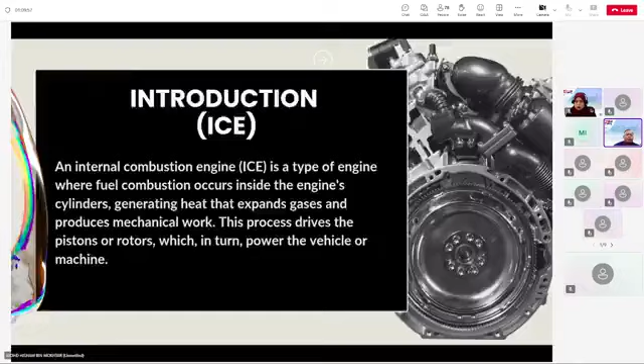What we are looking at today, as content: first, introduction. Second, internal combustion engine. Third, homogeneous charge compression ignition, HCCI. Fourth, reactivity controlled compression ignition, RCCI. Fifth, a new engine, the ammonia engine. Sixth, hydrogen combustion. Seventh, detonation engine.

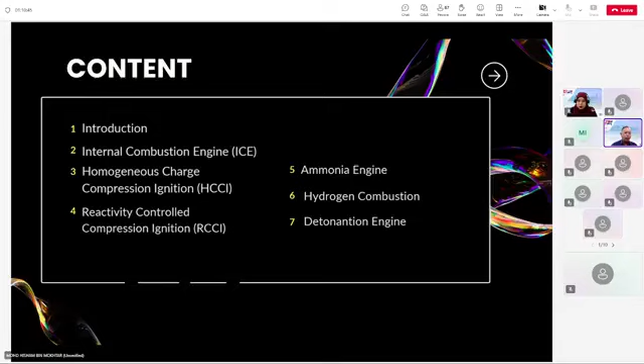I will share some new technology about the internal combustion engine today, so perhaps everyone can understand. Maybe the information is good for your information and knowledge, for all the members of technologists.

Internal combustion engine, ICE. In ICE, fuel is burned inside the engine itself, typically in a chamber called the cylinder. Heat from expanding gases from combustion pushes the piston, which drives a crankshaft to produce mechanical power. ICE are commonly found in cars, motorcycles, and aircraft.

External combustion engine - today we are not talking about the external combustion engine. Fuel is burned outside the engine and the generated heat is transferred to a working fluid, such as water, which powers the engine. As an example, the steam engine, where coal is burned to heat water to produce steam, which then drives the piston or turbine.

So, main engine types: gasoline engine uses a spark to ignite a mixture of fuel and air. Diesel engine relies on high compression to ignite the fuel without a spark. Later, I will explain about the main engine types using gasoline engine and diesel engine.

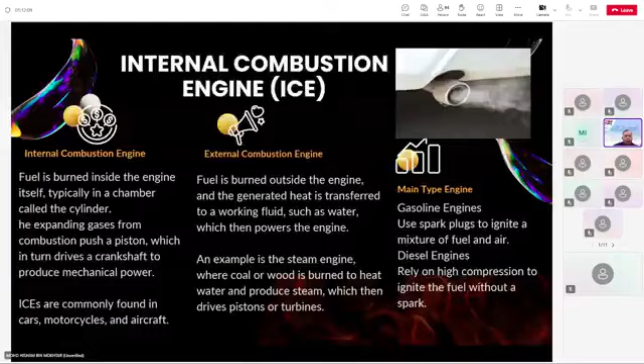Okay, first we are talking about the diesel engine. A diesel engine is a type of internal combustion engine that operates using the heat of compression to ignite the fuel, rather than using a spark plug like a gasoline engine. In the diesel engine, air is compressed to a much higher degree, raising the temperature inside the cylinder. When the diesel fuel is injected into the compressed air, it ignites spontaneously, causing a controlled explosion that pushes the piston and generates power.

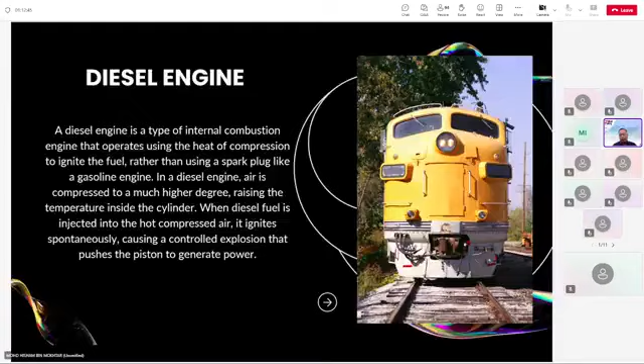Okay, maybe somebody knows, maybe somebody doesn't know about why there's no spark plug. Compression ignition - diesel engines were not using spark plugs. Compression engine is a type that uses compression. In the diesel engine, the fuel is ignited by the heat generated from compressing air, not by a spark plug. Higher compression ratios - diesel engines operate at higher compression ratios, around 14:1 to 25:1, compared to gasoline engines, leading to high temperature and pressures.

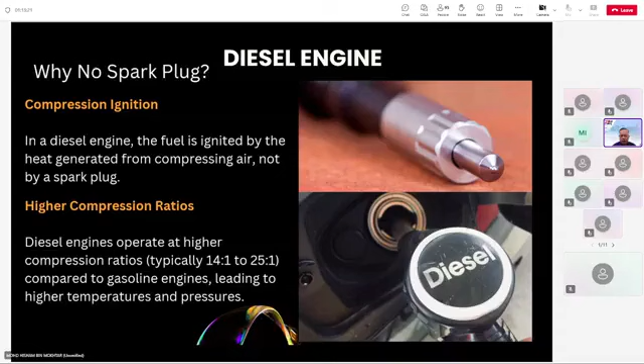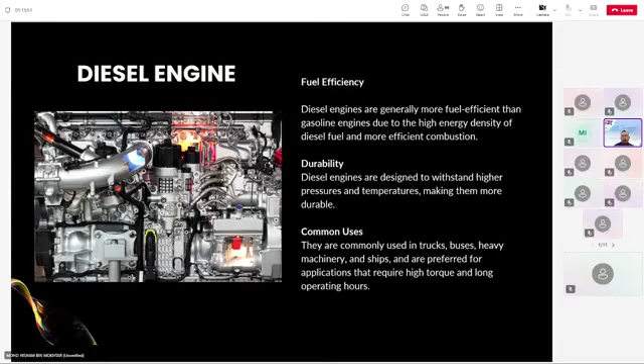Diesel engine fuel efficiency - diesel engines are generally more fuel efficient than gasoline engines due to the high energy density of diesel fuel and more efficient combustion. Durability - diesel engines are designed to withstand high pressure and temperature, making them more durable. Common use - they are commonly used in trucks, buses, heavy machinery, ships, and preferred for applications that require high torque and long operating hours.

A diesel engine relies on compression rather than a spark plug. The key difference between diesel and gasoline engines is how the air-fuel mixture ignites. In a diesel engine, air is compressed to much higher pressure than in a gasoline engine, which raises its temperature. When the diesel is injected into this hot compressed air, it ignites without the need for a spark plug. These are internal combustion engines used for motorcycles, aircraft, ships, and generators due to their efficiency and versatility. However, they emit greenhouse gases contributing to environmental concerns, leading to a growing focus on electric and hybrid technologies.

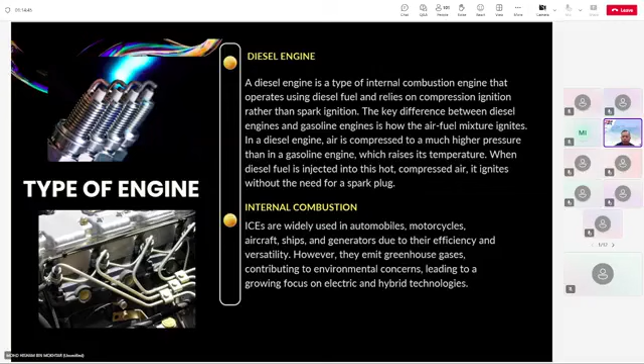Now we're looking at diesel operation. Diesel combustion is known for its high thermal efficiency and torque output, which makes diesel engines ideal for heavy-duty applications like trucks and industrial machinery. However, the process can produce more nitrogen oxide and particulate matter compared to gasoline engines, requiring additional emission control technologies.

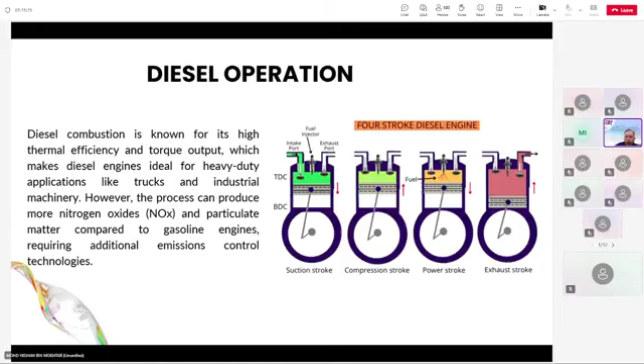This is the process. First, the process is suction - the inlet valve will be open, exhaust valve closed, then air is sucked into the cylinder. Number two, compression - intake valve is closed, exhaust valve is also closed. Air is compressed in the combustion chamber, diesel is injected. During this there is high temperature and also high compression while the diesel is injected.

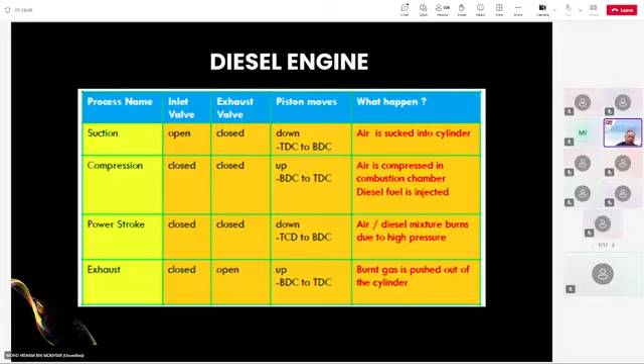Power stroke - intake valve is closed, piston moves, exhaust valve is closed, air-diesel mixture burns due to high pressure. Exhaust - intake valve is closed, exhaust valve is open, burnt gas is pushed out of the cylinder. This is the normal sequence for diesel and gasoline engines.

How about we look at the four-stroke engine operation? Four-stroke is the normal engine we use every day. Intake stroke - the piston moves down, drawing in the air-fuel mixture through the open intake valve. Compression stroke - the piston moves up, compressing the air-fuel mixture to increase its energy potential. Power stroke - the spark plug ignites the compressed mixture, causing an explosion that pushes the piston down and generates power. Exhaust stroke - the piston moves down, then moves up again, expelling burnt gases through the open exhaust valve. This is the normal sequence.

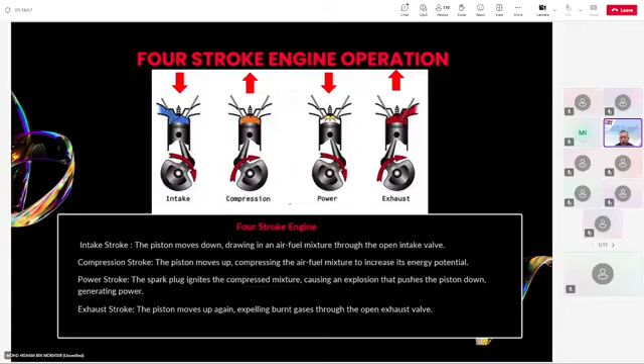How about the two-stroke engine? Two-stroke engine - high power output per displacement, simpler design, better for higher RPMs. Commonly used in small applications like motorcycles, lawn mowers, and chainsaws.

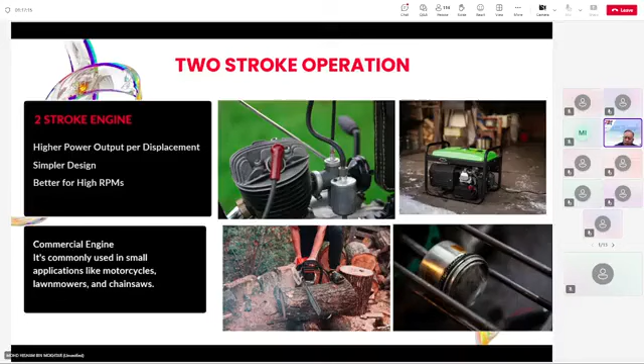For your information, in a two-stroke engine, the intake, compression, combustion, and exhaust processes occur in two movements of the piston. That means compression and power stroke combine into one downstroke process. Then exhaust and intake combine into one upstroke process. The two-stroke engine is known for being simpler, lighter, more compact, but is less fuel efficient and produces more emissions compared to the four-stroke engine.

So as we all know, this two-stroke is a small engine, used in applications like motorcycles, lawn mowers, and chainsaws.

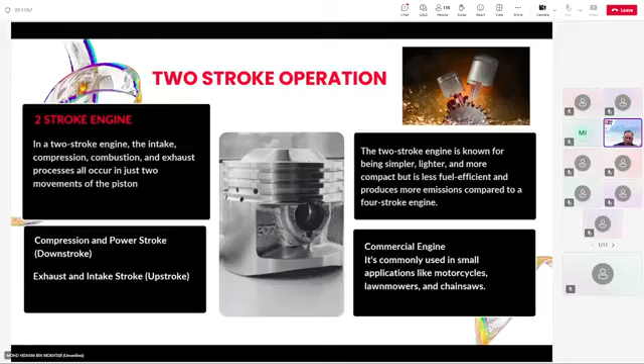Now we start on the potential of ICE. The potential of ICE is the new technology called homogeneous charge compression ignition, HCCI - an advanced type of internal combustion engine that combines elements of both spark ignition used in gasoline engines and compression ignition used in diesel engines. HCCI engines achieve combustion by compressing a homogeneous air-fuel mixture to the point where it spontaneously ignites due to high pressure and temperature, eliminating the need for a spark plug and precise direct fuel injection timing for ignition.

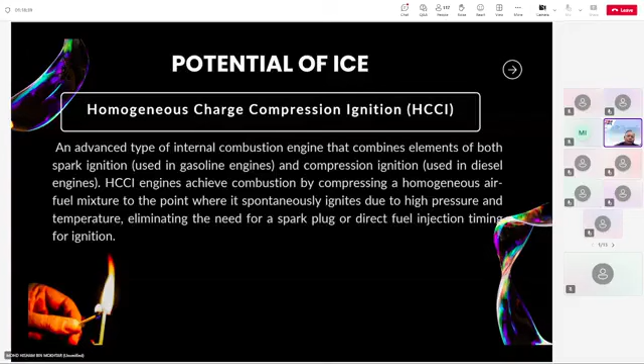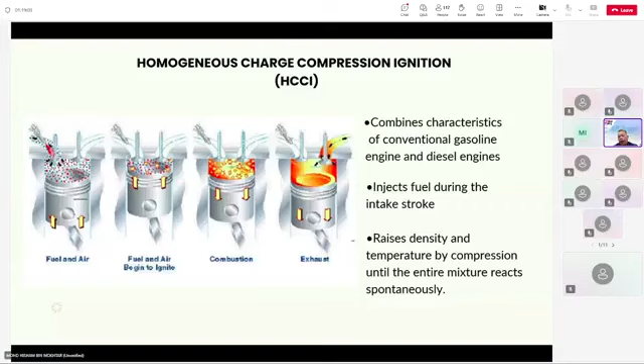This is HCCI. HCCI means homogeneous charge compression ignition. It combines characteristics of the conventional gasoline engine and the diesel engine - fuel is injected during the intake stroke, raising density and temperature by compression until the entire mixture reacts spontaneously.

For your information, HCCI has gasoline engine-like emissions with diesel engine-like efficiency of 50 to 60% combustion efficiency, raising density and temperature by compression until the entire mixture reacts spontaneously.

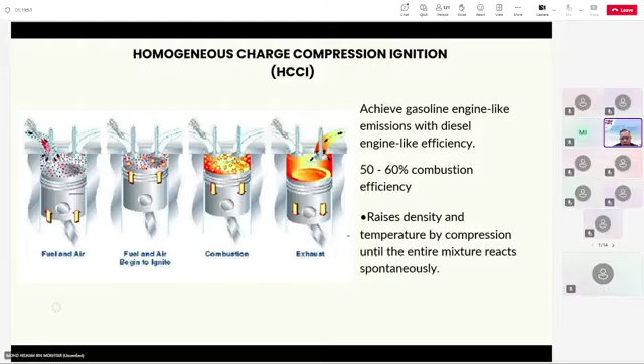For your information, the fuel and air were mixed before entering the combustion chamber. The fuel and air begin to ignite as the mixture is compressed. Then combustion happens at the combustion stroke, followed by the exhaust stroke. After that, the exhaust valve opens to let the scavengers out.

Homogeneous charge compression ignition, HCCI, has some weaknesses. Auto ignition is difficult to control, it has a small torque range, and is constrained at low load due to lean flammability limits, and high loads are restricted by in-cylinder pressure, with only a small range of stable combustion. Because HCCI is still under development, these weaknesses need to be overcome to get better results for this engine.

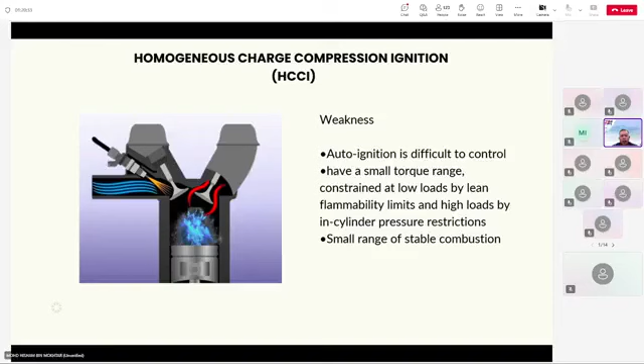Several countries and leading automotive companies are actively researching and developing HCCI engines to improve efficiency and reduce emissions, such as USA, Japan, Sweden, South Korea, and China.

Now we are changing to RCCI, Reactivity Controlled Compression Ignition. It is an advanced combustion technology that aims to combine the benefits of traditional diesel engine efficiency and gasoline engine low emissions. RCCI is a dual fuel combustion concept that strategically controls the reactivity of different fuels to achieve superior performance and cleaner combustion. This is quite special.

In RCCI there are two types of nozzles or injectors, PFI and DI. PFI means low reactivity fuel, DI means high reactivity fuel. It requires two different fuels - you must remember the cylinder requires two different fuels. Low reactivity fuel gets injected into the intake port at low pressure during the intake stroke. High reactivity fuel is injected into the cylinder at high pressure near the end of the compression stroke. The whole fuel charge is ignited near top dead center of the piston by injecting the high reactivity fuel.

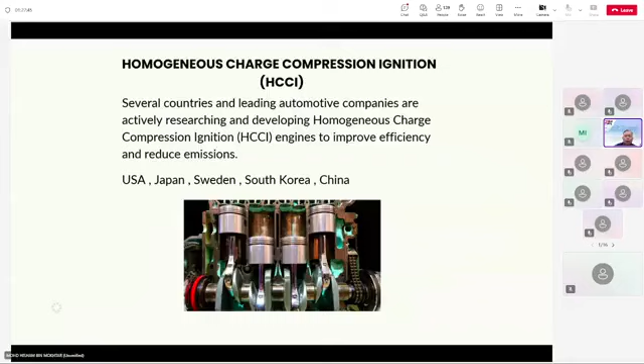Before we go to the RDE, let's go back to RCCI first. I come back to RCCI because there is some process that I can explain. It's an advanced combustion technology aimed to combine the benefits of traditional diesel: efficiency and low emission.

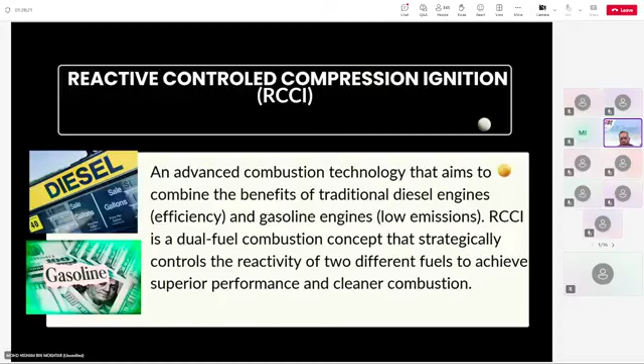RCCI is a dual fuel combustion concept that strategically controls the reactivity of two different fuels to achieve superior performance and clean combustion. This combustion process needs two types of fuel. First, PFI, a low fuel reactivity fuel, requires two different fuels.

During the combustion engine, the PFI will be injected through the intake port. Then the high reactivity fuel is on standby to ignite, to be sprayed during the high compression.

Low reactivity fuel gets injected into the intake port with low pressure during the intake stroke. High reactivity fuel gets injected into the cylinder with high pressure at the end of the compression stroke.

That means both different fuels are used to get the explosion and the combustion. The whole fuel charge ignites near top dead center of the piston by injecting the high reactivity fuel.

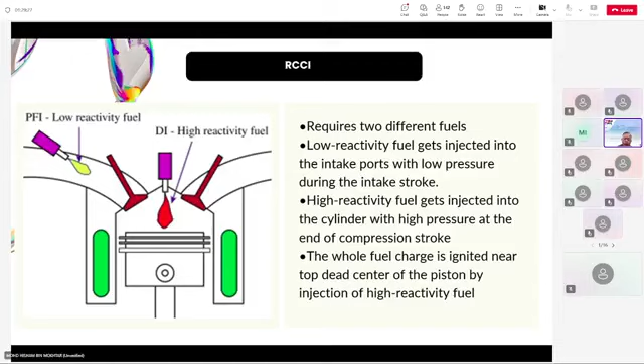During high reactivity injection, the fuel is like diesel, and the PFI is usually for the gasoline engine. So the process is: the LRF air injector will be on standby to inject.

The HRF is at top dead center, and when the pressure and temperature are controlled and enough, the HRF will ignite the diesel. Then the LRF with air, on standby, will mix together.

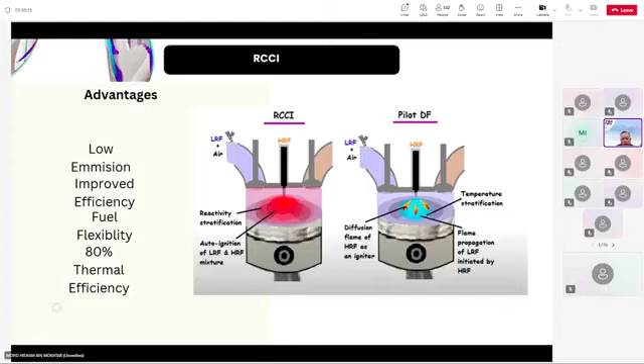That's because it's reactive, like HCCI. So it results in low emission, improved efficiency, fuel flexibility, and 80% thermal efficiency. It's a quite unique and new design of engine.

Advantages of RCCI: low emission, reduce NOx, CO2 and soot, controlled combustion process, avoiding incomplete combustion, improved efficiency, and fuel flexibility.

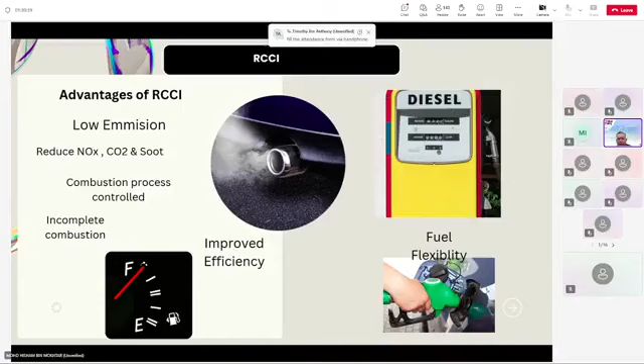Countries like the United States, Japan, Germany, along with leading compression engine manufacturers, are effectively researching RCCI technology, collaborating with universities and research labs, aiming to overcome challenges such as fuel supply systems and engine adaptability for widespread use.

So the RCCI engine represents a major innovation in internal combustion engine design, aligning with global efforts to reduce environmental impact while maintaining performance and reliability.

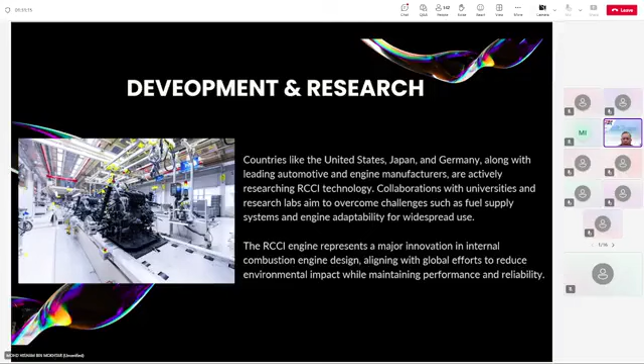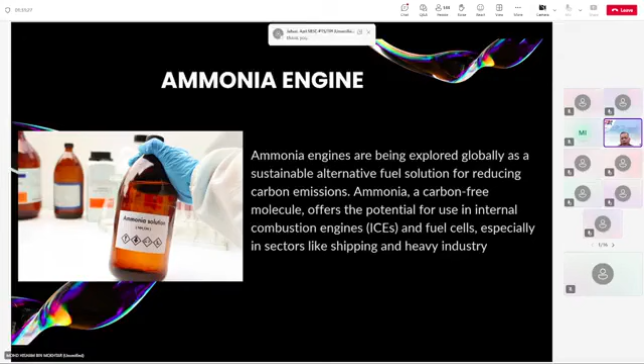Okay, just now we explained about the ammonia engine. The fuel will be changed to ammonia. The ammonia engine is carbon free. As a fuel, ammonia produces no direct carbon emission.

Energy density is higher than hydrogen, and its liquid form makes it easier to store and transport. Producing and transporting it can use existing ammonia production and distribution networks that can be adapted for energy use. It's cost effective, potentially cheaper than hydrogen as a green fuel, depending on the production method.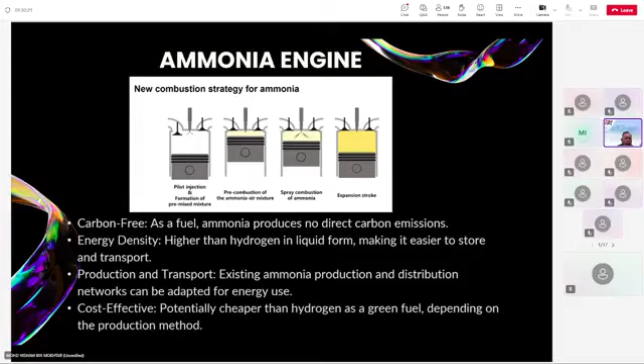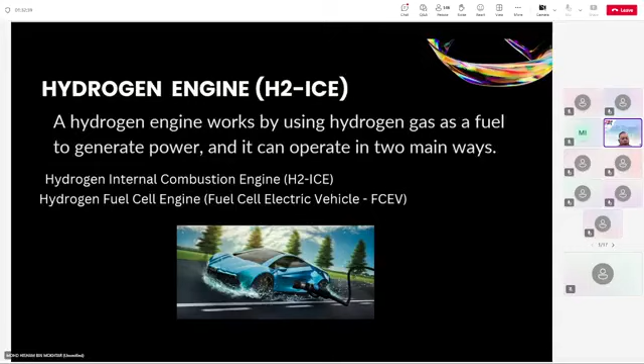So next is the hydrogen engine, as I explained. The hydrogen engine works by using hydrogen gas as fuel to generate power. It can operate in two main ways: hydrogen internal combustion engine, and hydrogen fuel cell engine, a fuel cell electric vehicle.

So for the hydrogen engine, during the exhaust stroke, the engine emits water vapor as its primary emission, making it environmentally very friendly because there is no harmful emission, since the combustion is very clean.

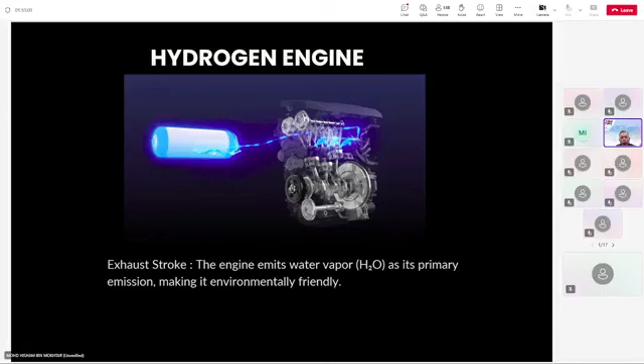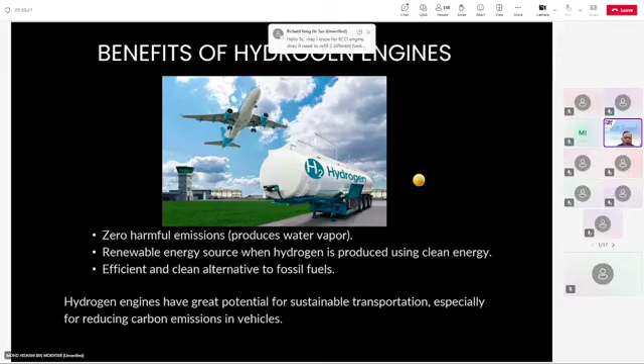So the benefits: zero harmful emission, produces water vapor, renewable energy source when hydrogen is produced using clean energy, efficient and clean alternative to fossil fuels. Hydrogen engines have great potential for sustainable transportation, especially for reducing carbon emission in vehicles.

So for the last one, this is the rotating detonation engine, RDE. This engine works by using a detonating supersonic combustion wave process to produce thrust or mechanical power. Unlike conventional engines which rely on deflagration, detonation engines use shock waves and high pressure combustion to achieve higher efficiency and performance. This type of engine is very fast and the explosion is quite higher than commercial use; it's usually used for aircraft and military.

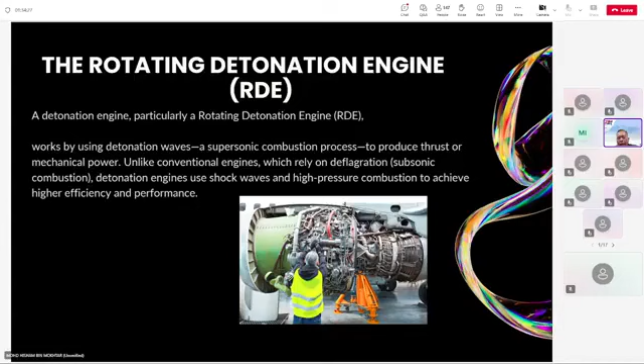The detonation engine utilizes a supersonic combustion wave to compress and ignite the fuel air mixture, resulting in rapid and efficient energy release. In the rotating detonation engine, a continuous detonation wave in the circular chamber provides thrust and rotational energy. It achieves higher thermal efficiency than conventional deflagration engines, reducing fuel consumption.

For your information, RDE is used for aircraft and military because it has very high compression, very fast combustion can happen, and higher thermal efficiency compared to commercial use.